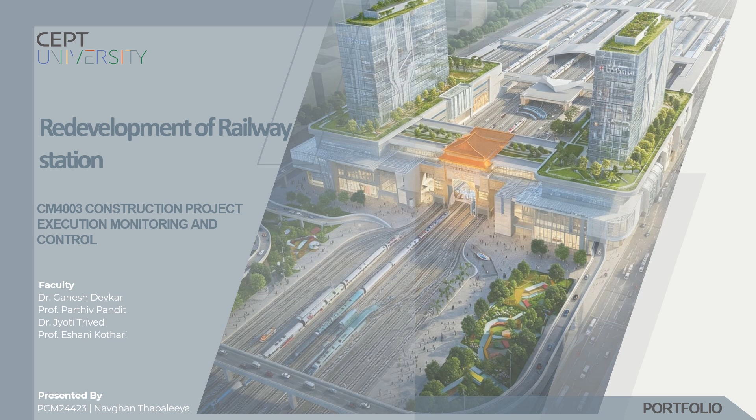Hello everyone, I am Navghan Thapaleeya, a postgraduate student at CEPT University, currently enrolled in the Master's program in Construction Engineering and Management. This video is my portfolio presentation for Studio 2, part of the course Construction Project Execution Monitoring and Control. My student code is PCM24423. In the following slides, I will be sharing the key insights, learnings, and field-based observations I gathered during this studio. Now moving towards the project brief.

So this project is about turning the railway station into a modern, eco-friendly transport hub. It will connect regional railway, the metro, and the upcoming high-speed rail to make travel easier and more efficient. It also aims to improve the passenger experience and support the local economy. The project covers 125 acres and is estimated to cost 2,400 crores. It is being built under the EPC model and is expected to finish in

2027. Some main features include a smart ticketing system, the MMTH building, a concourse with shops, better railway tracks, and new parcel buildings. The main goals are to make travel safer and more comfortable, support business activity, ease traffic in the area, and bring in more revenue for Indian Railways while also caring for the environment.

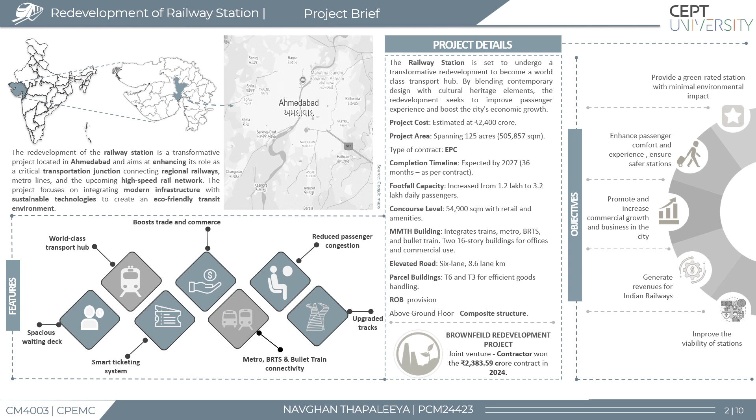Now coming to the cost of quality deliverables. So we have done prevention cost, appraisal cost, and deviation cost, which includes the cost of rectification of non-conformities. So preventive cost was calculated at 32,09,393 rupees. A major portion of this went towards establishing a quality control lab and purchasing lab equipment to conduct various tests, which together comprise more than 91% of the total preventive expenditure.

Other important costs included staff training, internal audits, and quality planning. These investments are aimed at proactively addressing construction issues through a proper quality control framework before the actual work begins. In contrast, the appraisal costs were 2.33 crore rupees, which is much higher than the preventive costs. It includes expenses related to ongoing inspection, in-process quality checks, and material testing.

The contrast between preventive and appraisal cost indicates that the site follows a reactive quality strategy, placing greater emphasis on catching errors after they happen rather than preventing them. A more preventive focused strategy could reduce long-term cost and enhance execution quality. You can also see the entire process of rectifying a non-conformity from the moment it is raised to its closure.

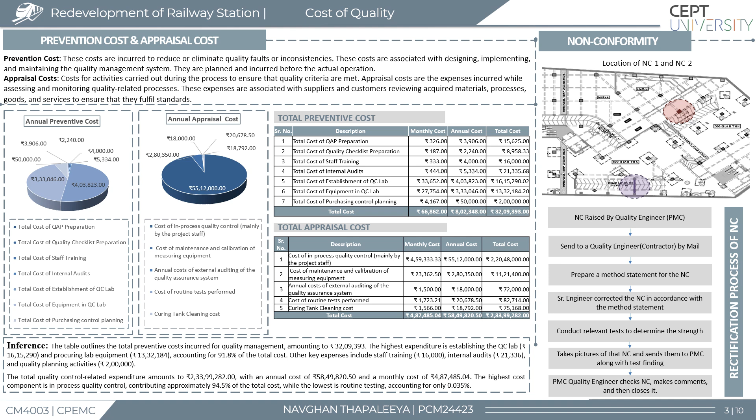Now coming to the non-conformity. So the first observed non-conformity was honeycombing, which occurred due to poor compaction during concreting. The total rectification cost was 3,296 rupees, with the equipment rental being the largest contributor, followed by labor and material costs. This kind of error, while minor in appearance, can lead to reduced structural durability and must be addressed through better supervision and proper compaction techniques.

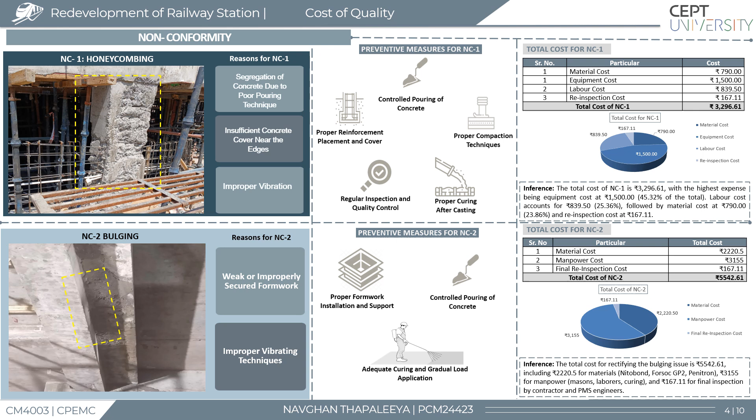The second non-conformity was bulging in the beam, caused by improper formwork and inconsistent concrete pouring. The rectification cost was 5,542 rupees. The breakdown includes material costs such as Nitobond, Forsoc GP2, and Penitron, as well as labor costs for mason and curing and final inspection charges. Avoiding such defects requires not only better formwork design and execution but also consistent supervision, compaction, and curing practices.

Now moving towards the tools of quality. This deliverable includes a control chart, histogram, and an Ishikawa diagram for root cause analysis. To assess the control quality, I used control charts, particularly X bar and R bar charts, to monitor the 7 days compressive strength of M70 grade concrete. These tools help detect inconsistency in the production process and ensure that it stays within control limits, allowing timely intervention when needed. Here you can see the values of upper control limit and lower control limit shown in tables.

Coming to the X bar chart. The X bar chart plotted average compressive strengths from multiple batches. All values remain within the upper and lower control limits, suggesting a stable and controlled process. This confirms that batching, mixing, and curing were executed consistently, meeting strength expectations.

The R-bar chart, which shows the variation in sample sets, also indicated control. However, some batches, especially samples 3, 9, and 10, show higher variability. These spikes suggest minor process deviations such as improper mixing and batching errors, which require tighter control in future operations.

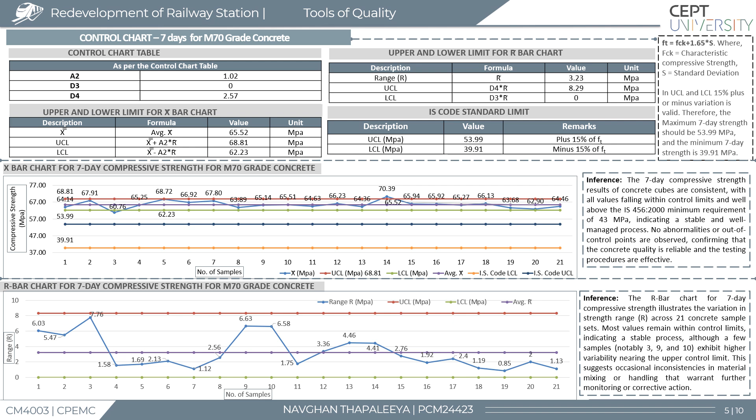As per IS 456-2000, the target compressive strength value should remain within defined limits. All our tested values exceed the minimum requirement of 43 megapascal, confirming the strength and quality of M70 grade concrete used on site and validating the testing method.

In this slide, you can see a fishbone diagram of a non-conformity, which is honeycombing, that identifies the main causes under 5M categories: unskilled workers, poor quality materials, faulty machinery like vibrators, incorrect measurement practices, and improper construction methods. These are the major causes which we highlighted.

These problems can lead to serious effects such as weak structure, poor bonding with reinforcement, inspection delay, and higher maintenance needs. To prevent this, some preventive measures are suggested like improving formwork, ensuring proper compaction and vibration, using good materials, and placing cover blocks correctly. Now moving toward the histogram.

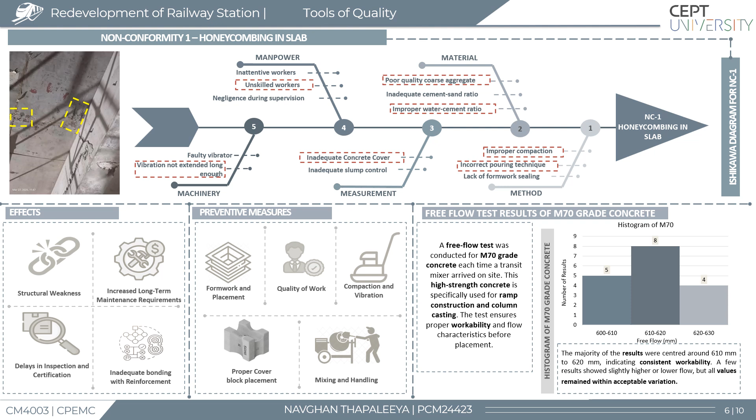So in the histogram, we consider the free flow test of M70 grade concrete. Alongside strength testing, they conducted free flow tests of every transit mixer delivering M70 concrete. Results mostly ranged between 610 to 620 mm, which falls within acceptable workability limits. This is crucial to ensure proper flow during placement, especially in complex elements like ramps and high columns.

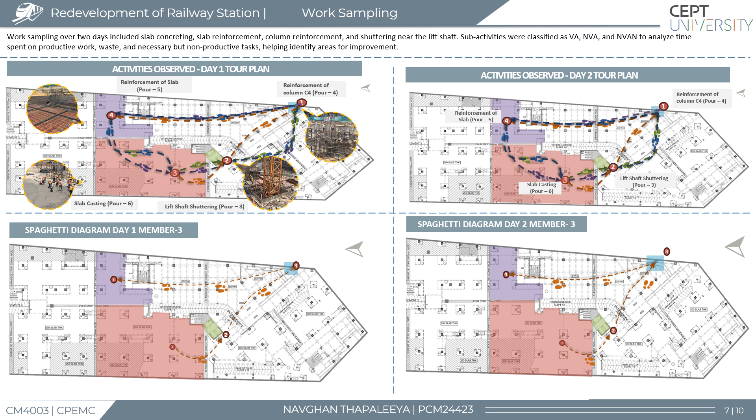This slide presents a work sampling study carried out over 2 days at the site. The main activities observed were slab concreting, slab reinforcement, column reinforcement, and shuttering near the lift shaft area. The slide includes floor plans showing the location of each activity and a spaghetti diagram mapping the movement paths of the site staff member on both days. This path helps visualize the time spent moving between tasks. The goal was to classify work as value added, non-value added, and necessary but non-value added to identify inefficiencies and improve work planning and productivity.

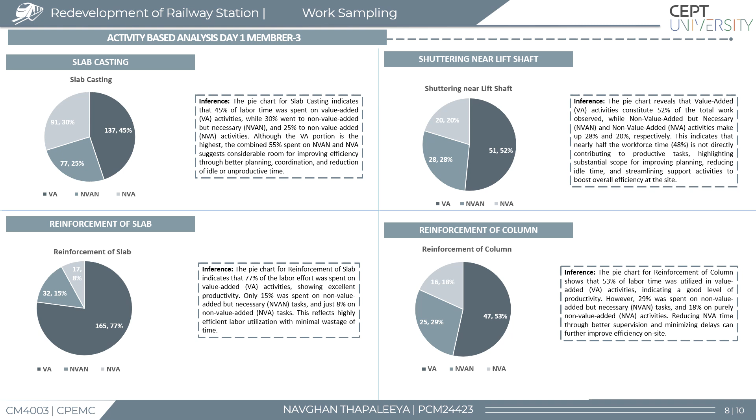Third one is slab reinforcement. Slab reinforcement performed very well with 77% of activities being value added, only 15% NVAN and 8% NVA activities. This means the team worked efficiently thanks to good planning, proper instruction, and materials being ready on time. Fourth one is column reinforcement. Column reinforcement had 53% value added, 29% non-value added but necessary, and 18% non-value added activity. While this is okay, there is still room to improve. The delays were mostly due to confusion in drawings and lack of coordination.

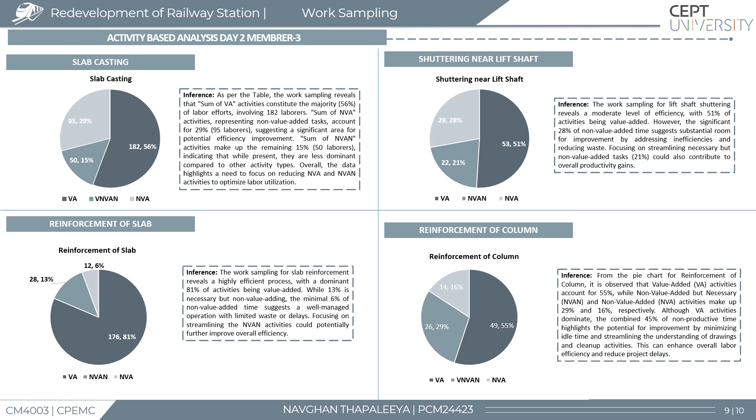This slide shows the activity-based work sampling analysis for day 2, focusing on four main construction activities: slab casting, shuttering near the lift shaft, slab reinforcement, and column reinforcement. Each pie chart breaks down how time was spent, whether it added value, was necessary but non-value added, or was purely non-value added. First is slab casting. Slab casting had 56% of labor time productive, but 29% was wasted, indicating room for improvement. Second is shuttering near the lift shaft at 51% productive work, but a high 28% of time was wasted. Third one is slab reinforcement, the most efficient with 81% of work being value added and very little waste. Fourth one is column reinforcement at 55% value added work, but a notable 45% was taken up by NVA and NVAN tasks.

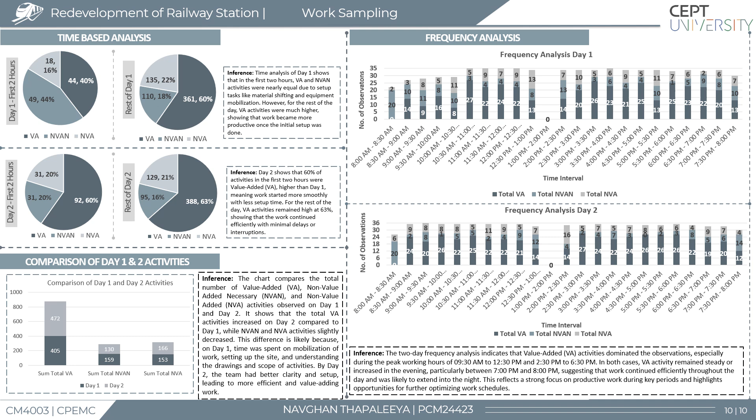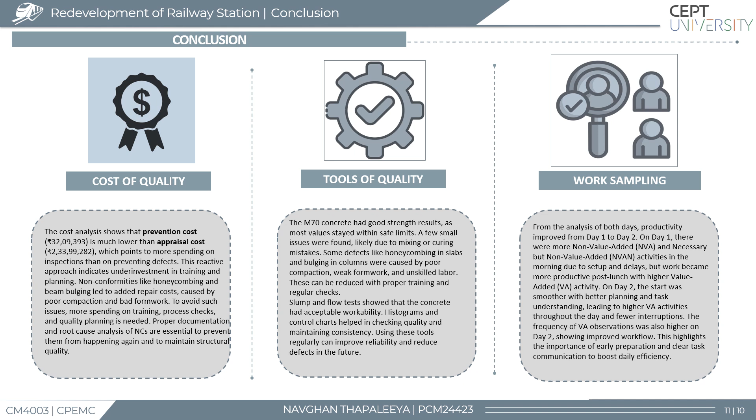Lastly, work sampling showed that productivity improved on day 2 compared to day 1 with better planning and fewer delays. More value-added activities were completed, especially after lunch and into the evening. This shows how preparation and clear communication can improve daily work performance.